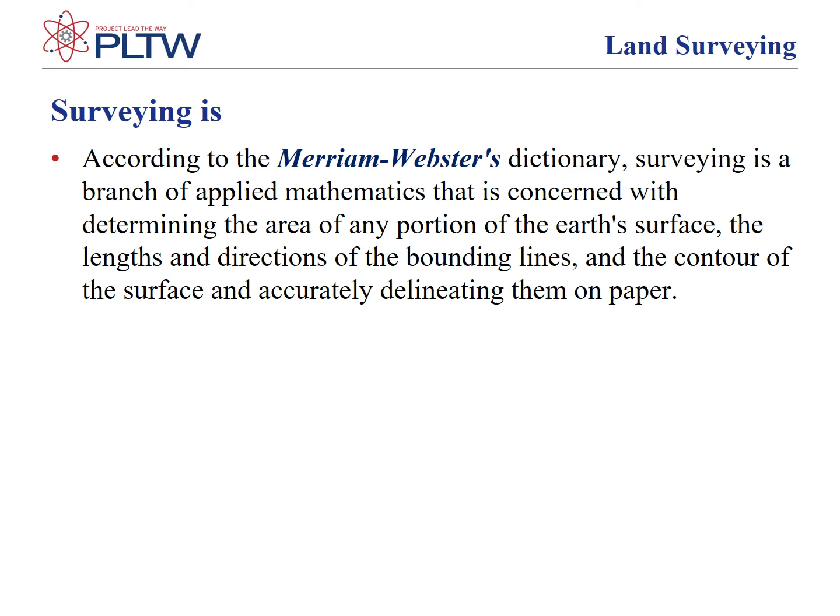According to the Merriam-Webster's dictionary, surveying is a branch of applied mathematics that is concerned with determining the area of any portion of the Earth's surface, the lengths and directions of the bounding lines, and the contour of the surface, and accurately delineating them on paper.

According to the publication Definitions of Surveying and Related Terms, a survey is defined as inspecting or investigating something in order to determine its state or condition, and surveying is the actual making of a survey and the recording and/or delineation of dimensions and details for subsequent use.

At its core, surveying is a profession tied to the accurate location of property boundaries.

The following are just a few of the most famous surveyors from history. George Washington, who was surveyor general in Virginia in 1749. Thomas Jefferson, who was a county surveyor for Albemarle County, Virginia in 1773. Lewis and Clark, who led an expedition to explore and survey the West. Daniel Boone, who resolved Kentucky's land disputes. And Abraham Lincoln, who was a surveyor in Illinois when elected as a state legislature.

Land surveying is the science of determining the relative positions of points on the Earth's surface. It is a wide area of study with many different types and methods employed by surveyors. There are two categories of land surveys that require different surveying methods: geodetic surveys and plane surveys.

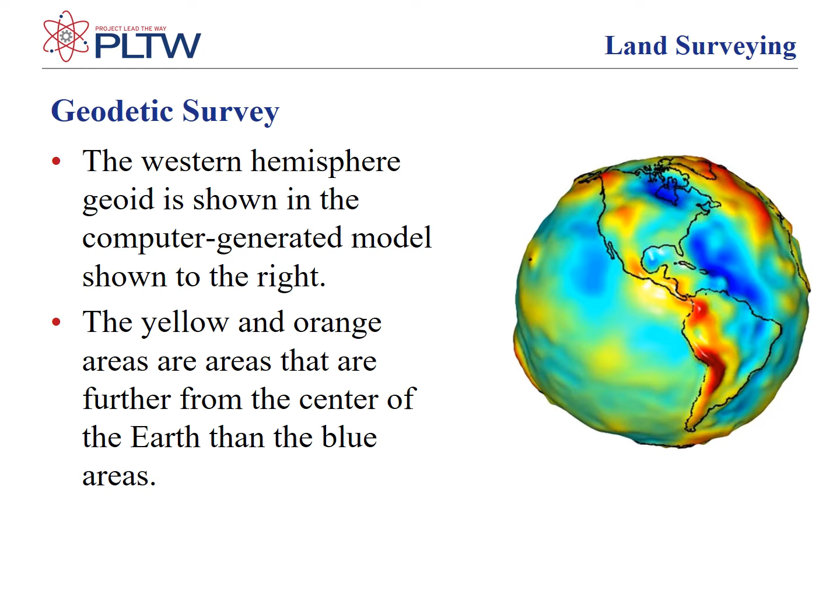Geodetic surveys use the geoid or another similar shaped model as a basis. These surveys are performed with great precision and are used to establish highly accurate control networks that provide points of known position throughout the U.S. and the world.

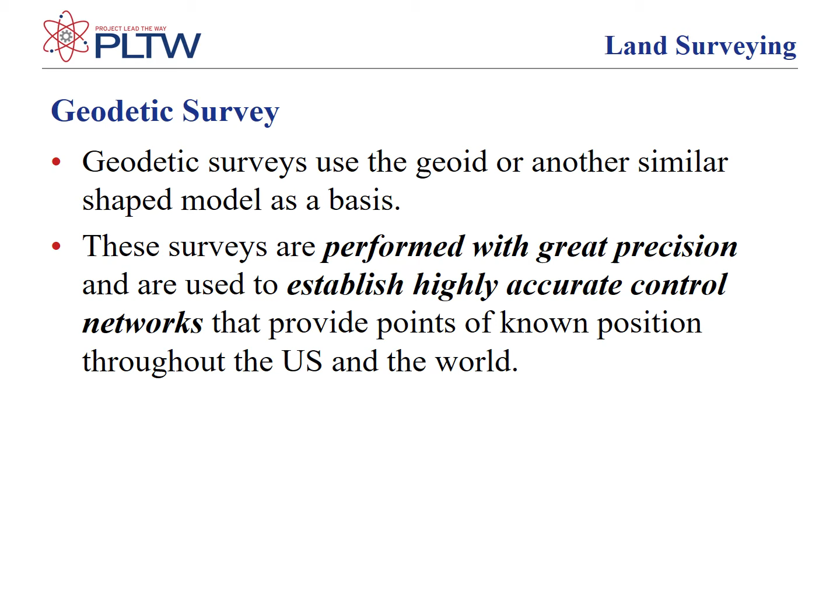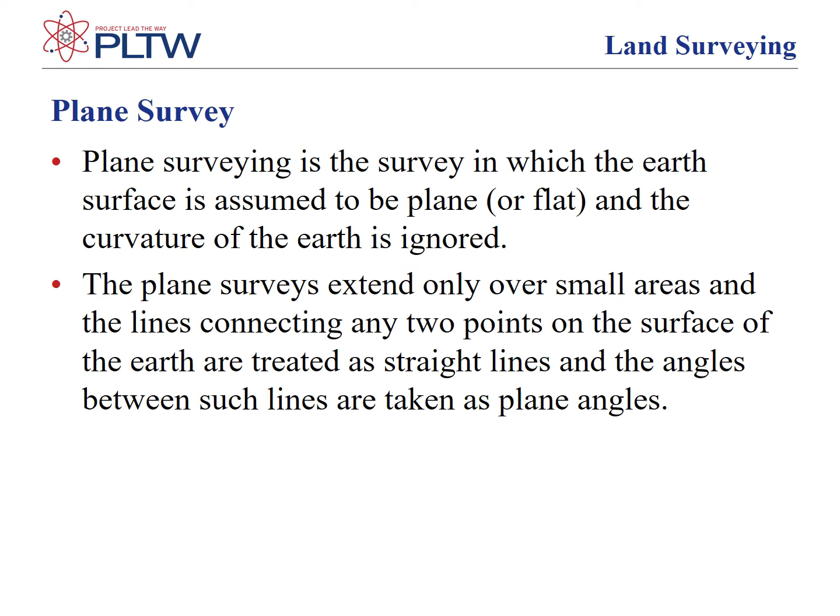Plane surveying is the survey in which the Earth's surface is assumed to be plane or flat, and the curvature of the Earth is ignored. Plane surveys extend only over small areas, and the lines connecting any two points on the surface of the Earth are treated as straight lines, with the angles between such lines taken as plane angles.

Plane surveys are more common than geodetic surveys. They are precise enough for small-scale surveys in a limited area, such as a construction site. They are used to determine legal boundaries, construction surveys, and small area topographic or control surveys.

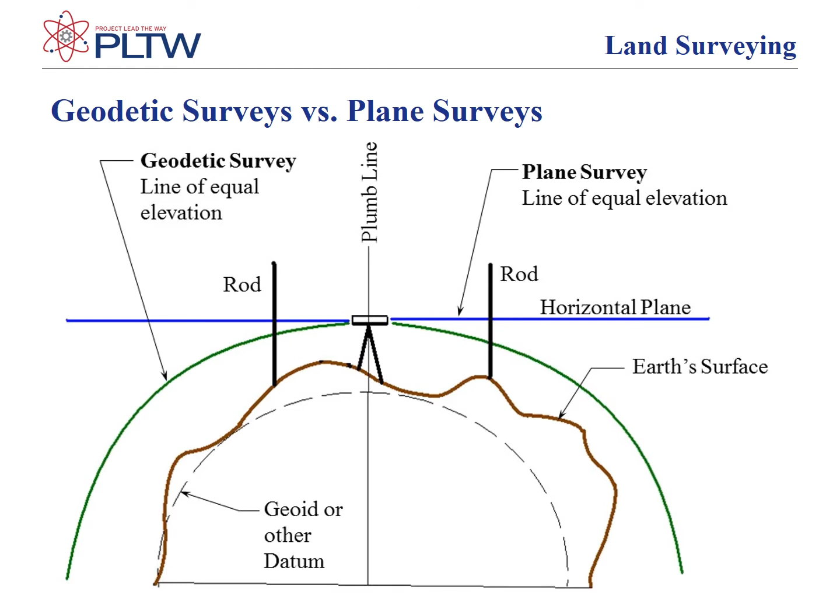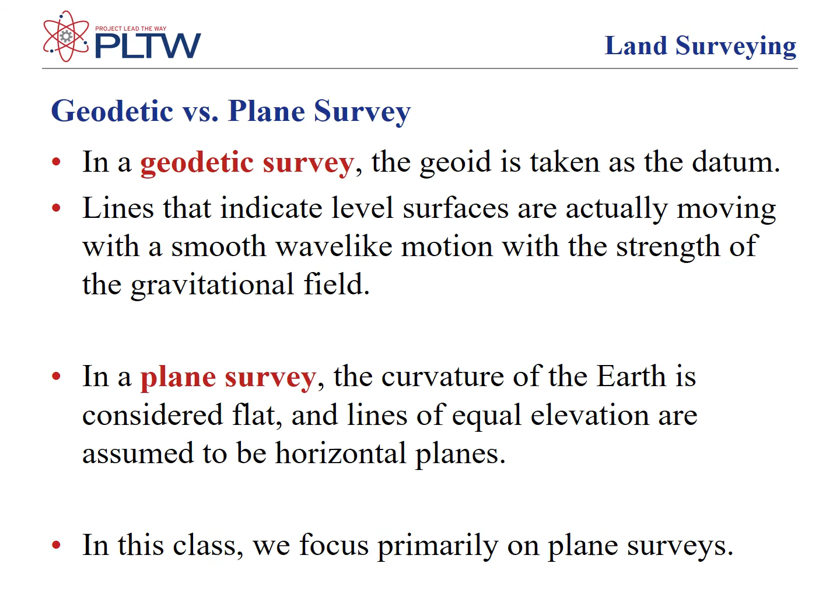This image shows the difference between a geodetic survey and a plane survey. In a geodetic survey, the geoid is taken as the datum. Lines that indicate level surfaces actually move with a smooth wave-like motion following the strength of the gravitational field. In a plane survey, the curvature of the Earth is considered flat, and the lines of equal elevation are assumed to be horizontal planes. In this class, we focus primarily on plane surveys.

Here are some of the types of surveys that we will cover in this presentation: control surveys, topographic surveys, property surveys, site surveys, and construction surveys.

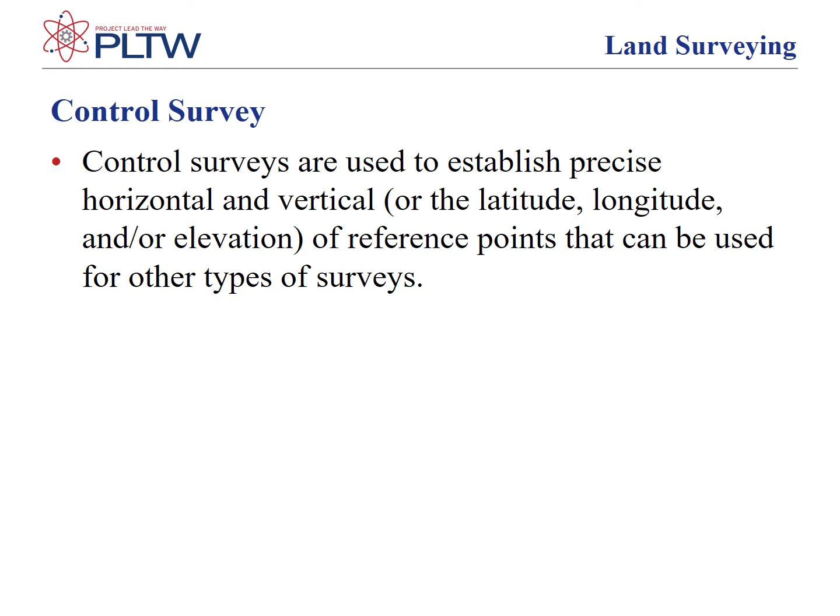Control surveys are used to establish precise horizontal and vertical positions, or the latitude and longitude and/or elevation of reference points that can be used for other types of surveys.

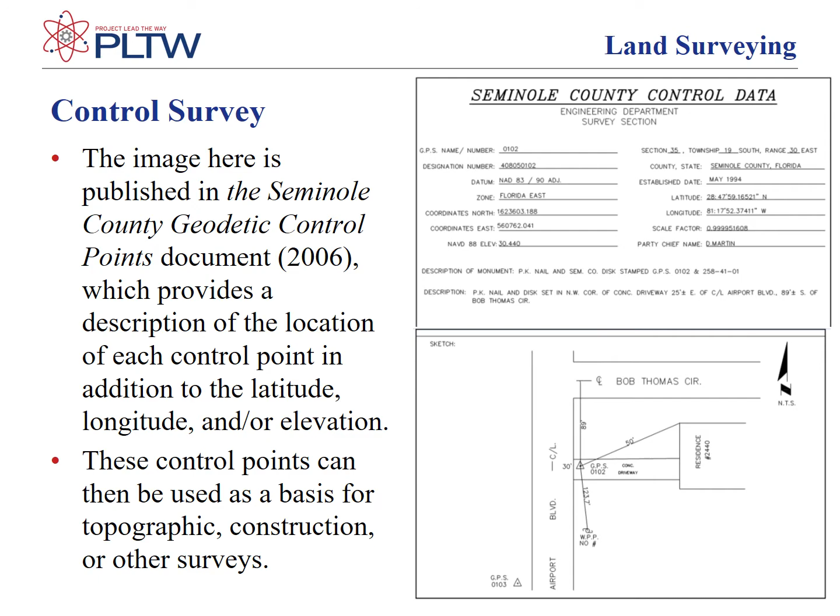A topographic survey gathers data on the location of natural and man-made features, contours, and ground elevation to create a topographic map.

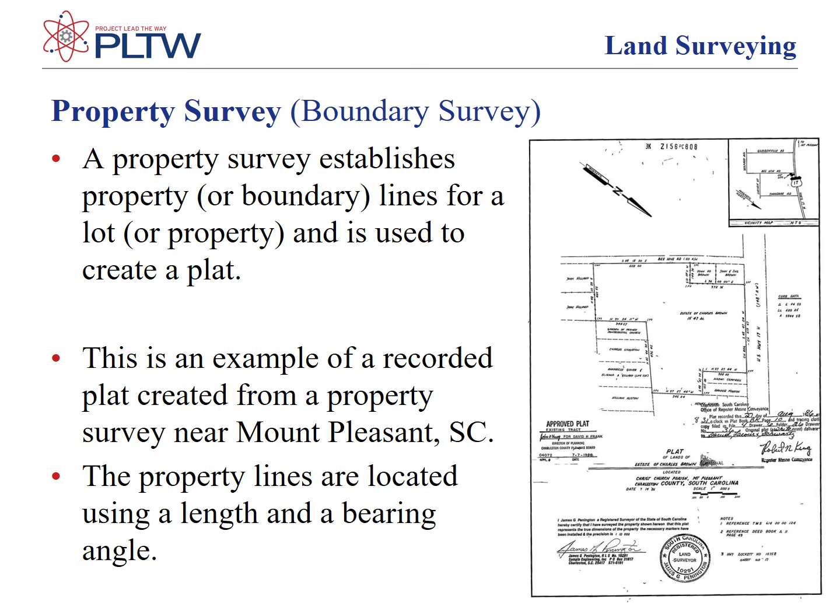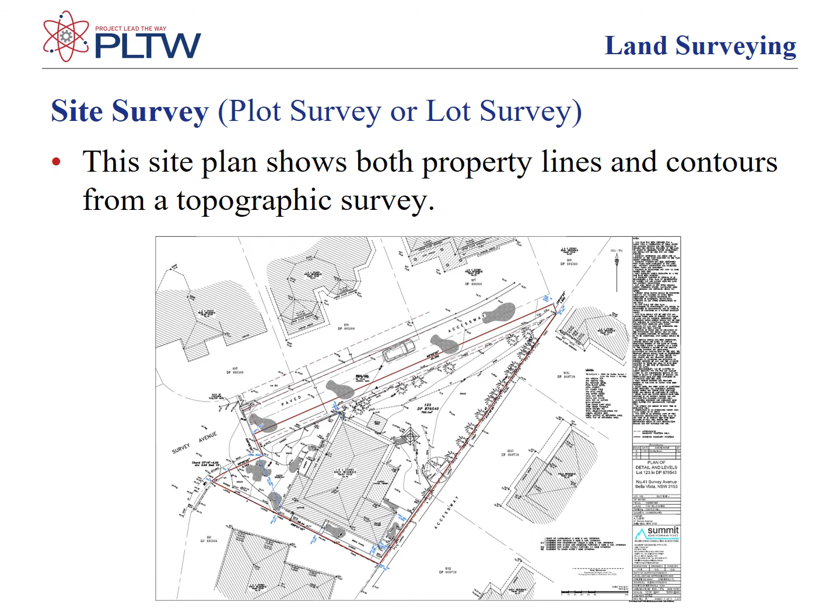A construction survey locates points and elevations that can be used to establish correct locations and elevations for engineering and architectural projects. Examples of construction surveys include staking a line and grade for a foundation, a fence, or a road.

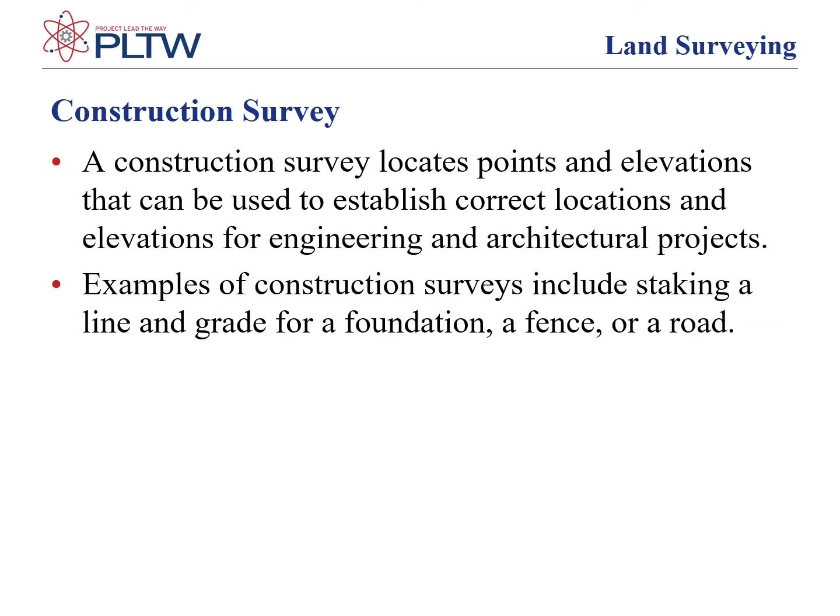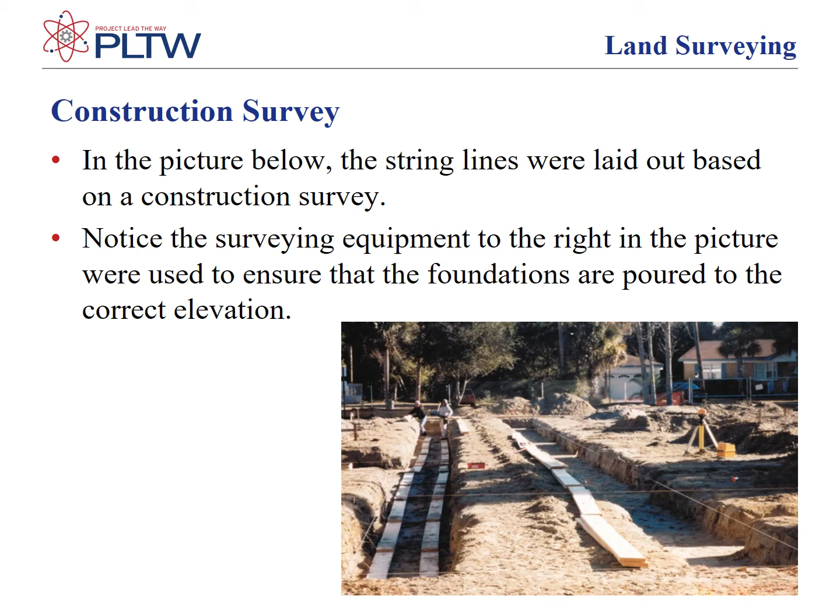In the picture below, the string lines were laid out based on a construction survey. Notice the surveying equipment to the right in the picture were used to ensure that the foundations are poured to the correct elevation.

There are many other types of surveying employed for different purposes that use different techniques. The following are just a few of the other types of surveys: bathymetric surveys, deformation surveys, foundation surveys, geological surveys, and hydrographic surveys.

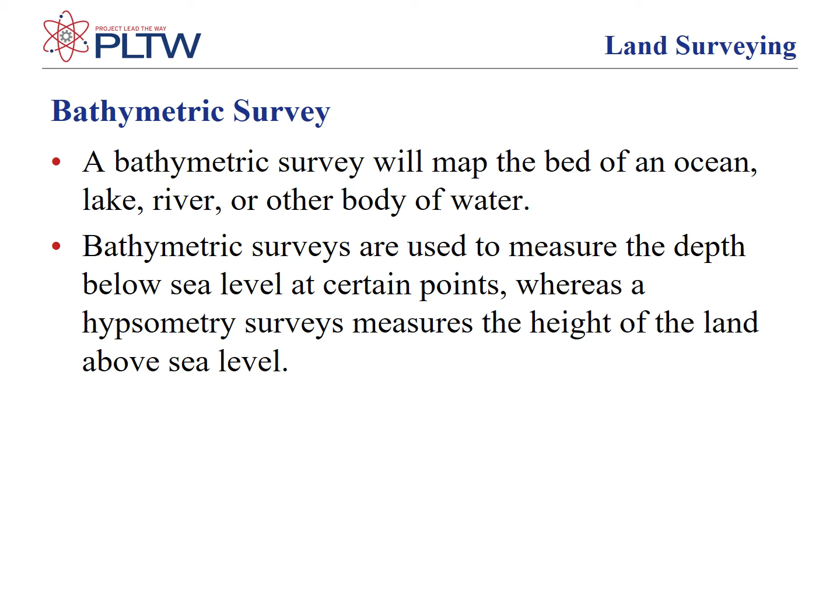A bathymetric survey will map the bed of an ocean, lake, river, or other body of water. Bathymetric surveys are used to measure the depth below sea level at certain points, whereas hypsometry surveys measure the height of the land above sea level.

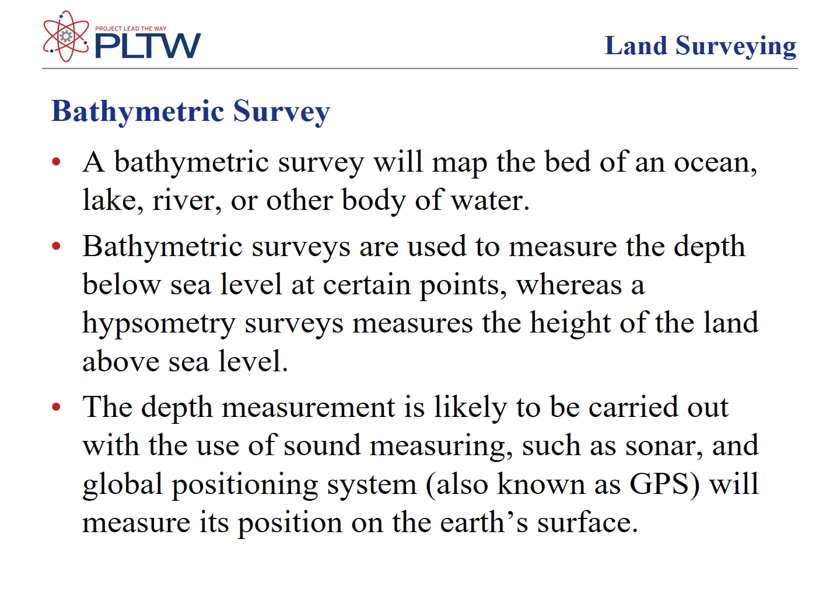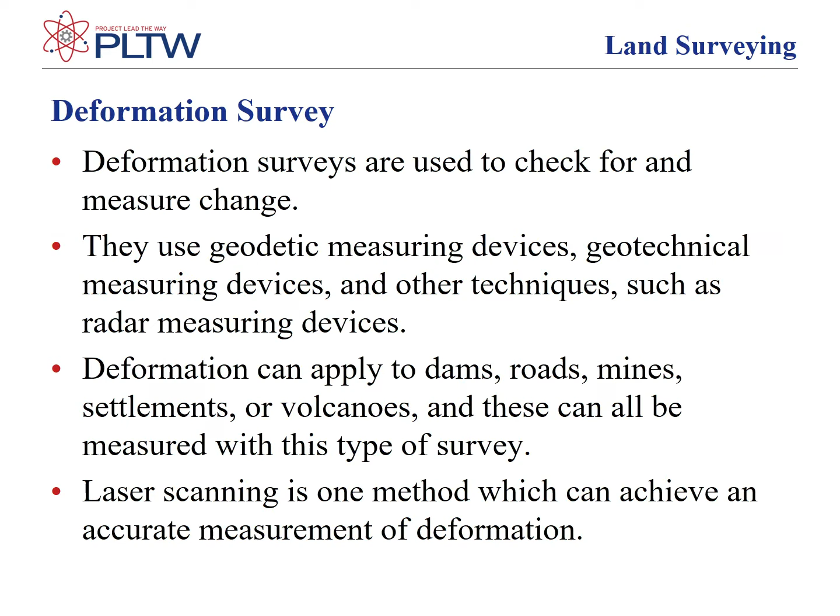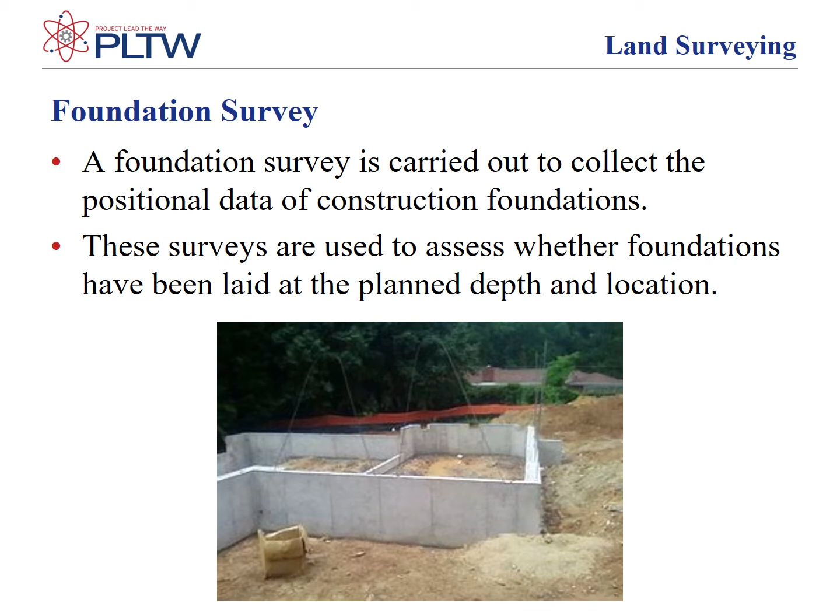A foundation survey is carried out to collect the positional data of construction foundations. These surveys are used to assess whether foundations have been laid at the planned depth and location. Hydrographic surveys map the coastline and seabed and are used in navigation and engineering.

Here are a common set of reference points for all surveys. Horizontal datum, which is a collection of points of a known latitude and longitude. Vertical datum, which is a collection of points of a known elevation. A benchmark, which is a permanent mark that establishes a point of known elevation.

You can search for information on datum reference points by referring to the National Geodetic Survey Data Explorer's National Geodetic Survey, which can be found at this link. The map you are about to see shows an area of a future project that will be located in Noblesville, Indiana. The red points are datum reference points. This map shows the datum reference points from the NGS Survey Control Map.

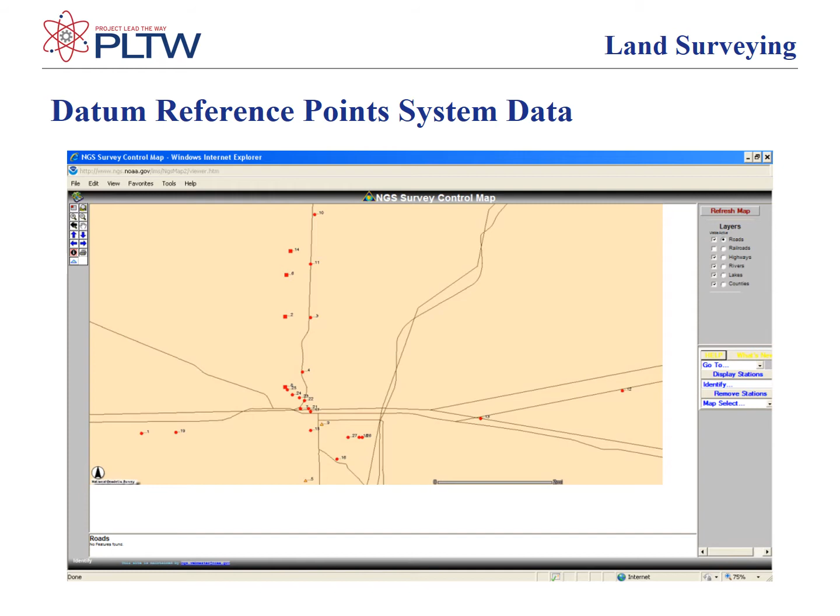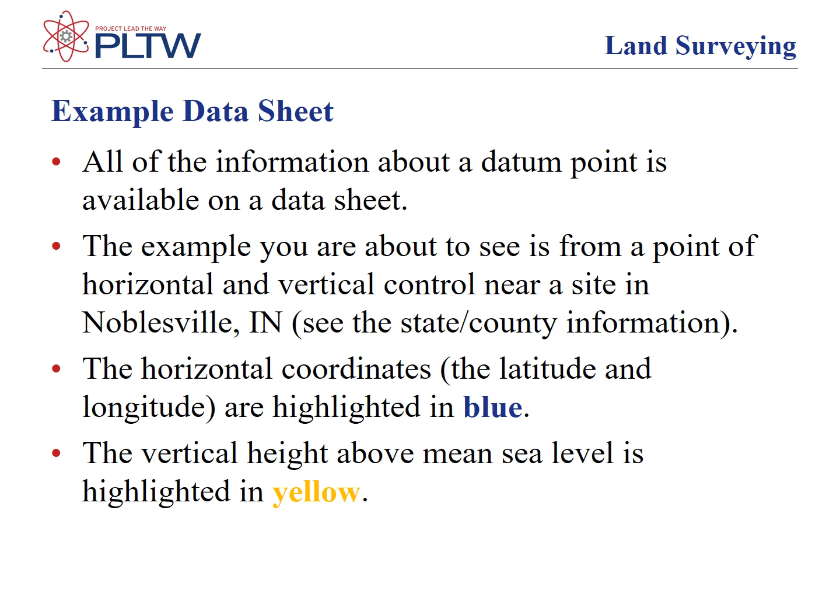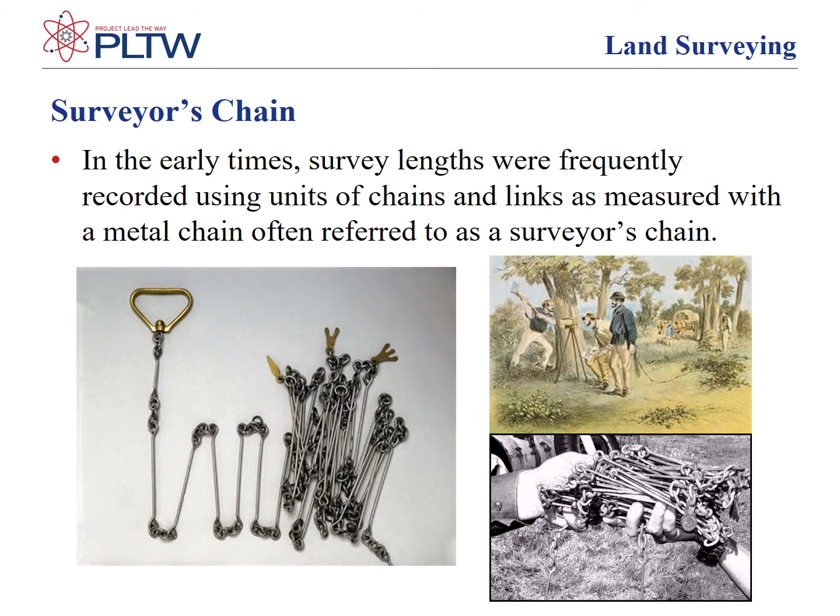In early times, survey lengths were frequently recorded using units of chains and links as measured with a metal chain, often referred to as a surveyor's chain. All optical equipment requires a visual line of sight. A level measures vertical differences in elevation. A theodolite measures vertical and horizontal angles.

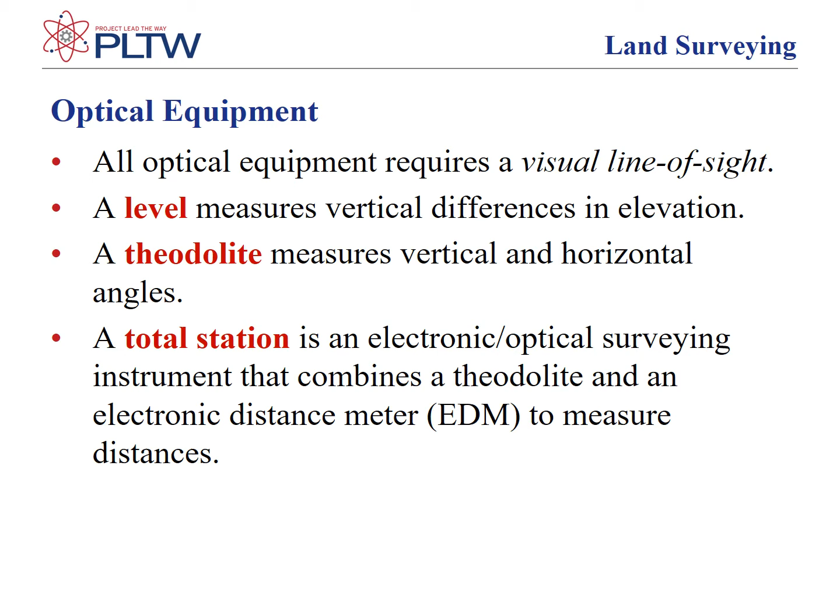An automatic level is commonly used on building sites because it is easy to set up and use. An internal compensator can automatically level the instrument. It can measure difference in elevation between the line of sight and a point.

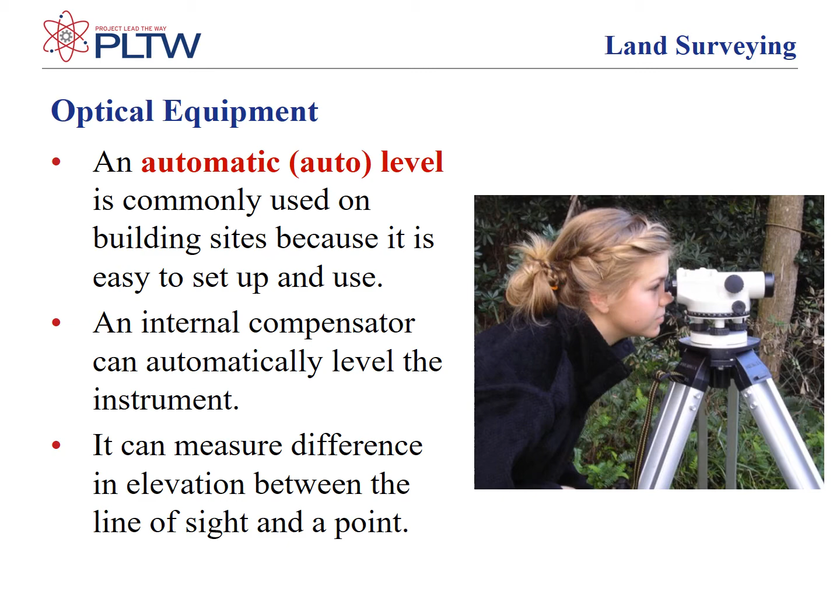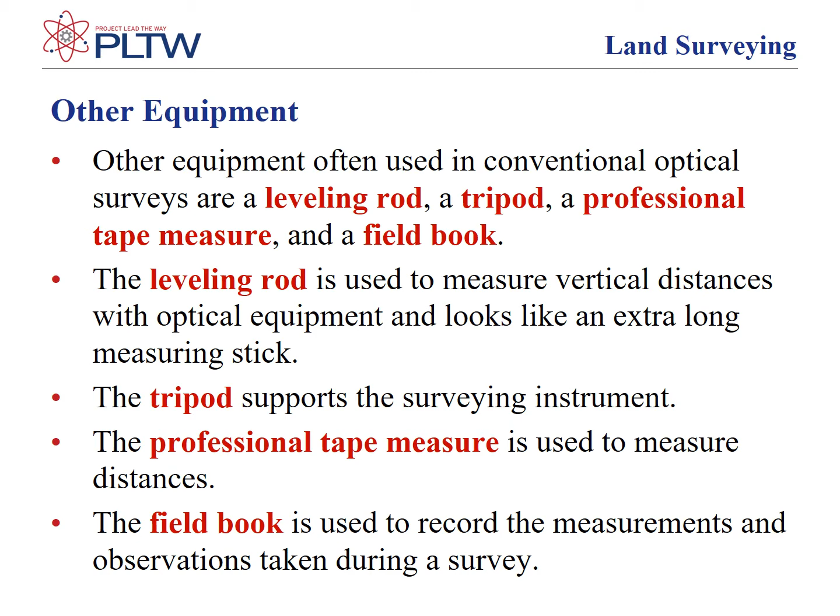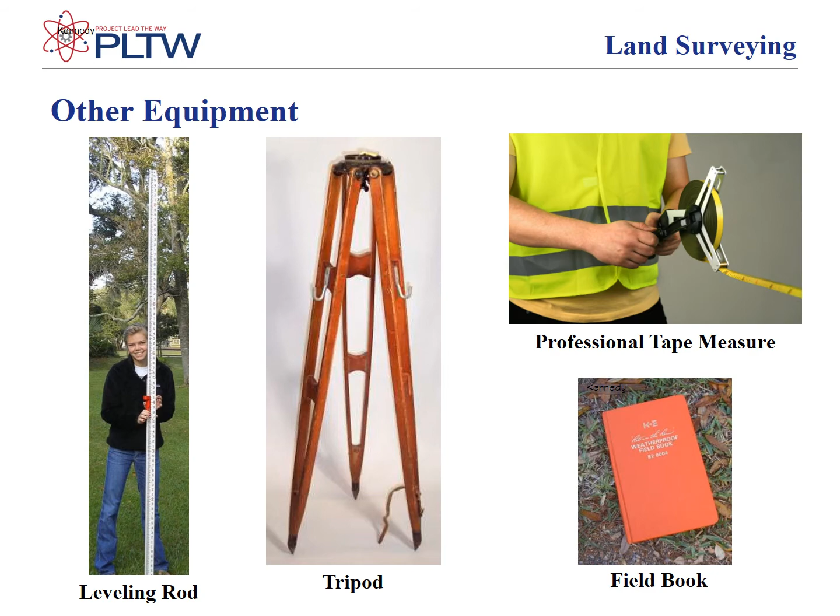The Global Positioning System, also known as GPS, is a global navigation satellite system that can be used for surveying as well as navigation. The GPS system is a free-to-access system developed by the United States Department of Defense. It consists of a constellation of many satellites that orbit the Earth, each broadcasting a unique radio signal. GPS receivers intercept several satellite signals in order to determine the distance to each satellite based on the time it takes the signal to reach the receiver.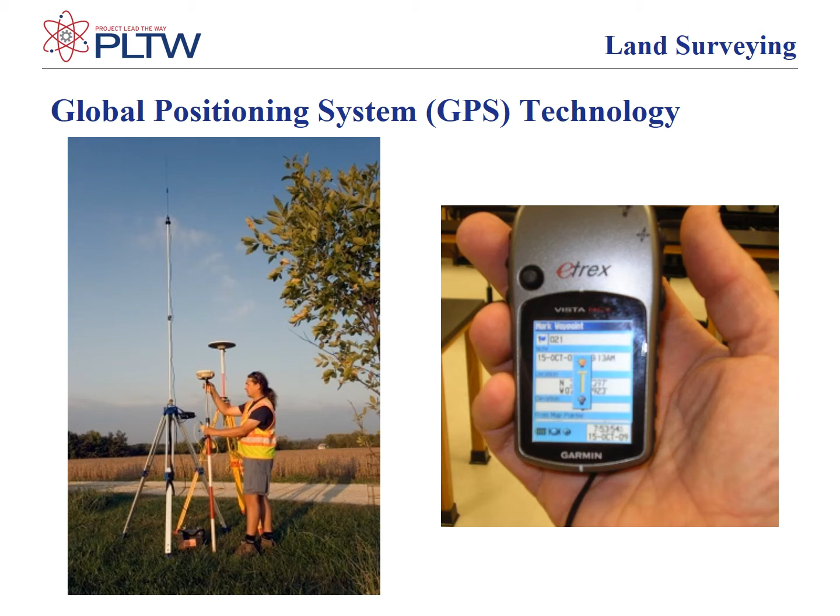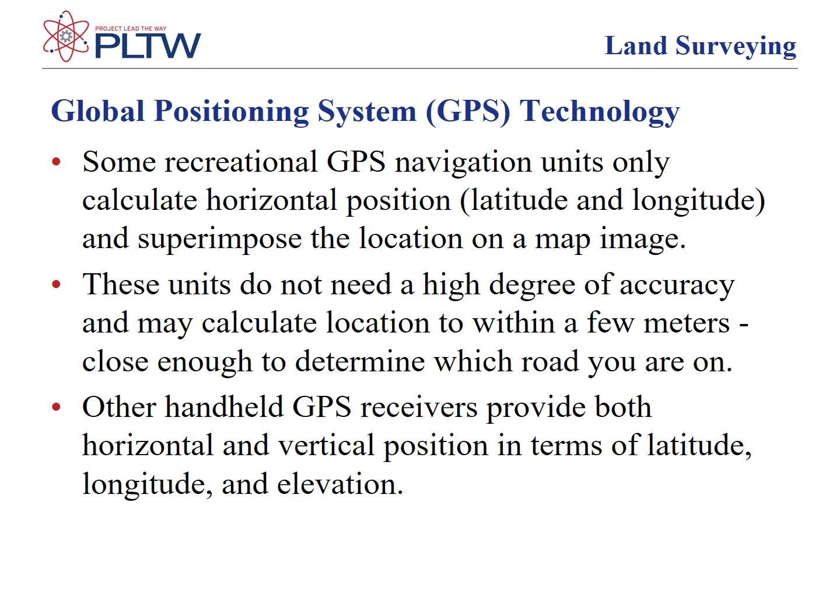Some recreational GPS navigation units only calculate horizontal position, latitude and longitude, and superimpose the location on a map image. These units do not need a high degree of accuracy and may calculate location to within a few meters, close enough to determine which road you are on. Other handheld GPS receivers provide both horizontal and vertical position in terms of latitude, longitude, and elevation. The accuracy varies with the unit.

Professional-grade GPS surveying equipment provides a much higher level of accuracy than the lower-cost recreational units. It calculates both horizontal and vertical position to a high degree of accuracy.

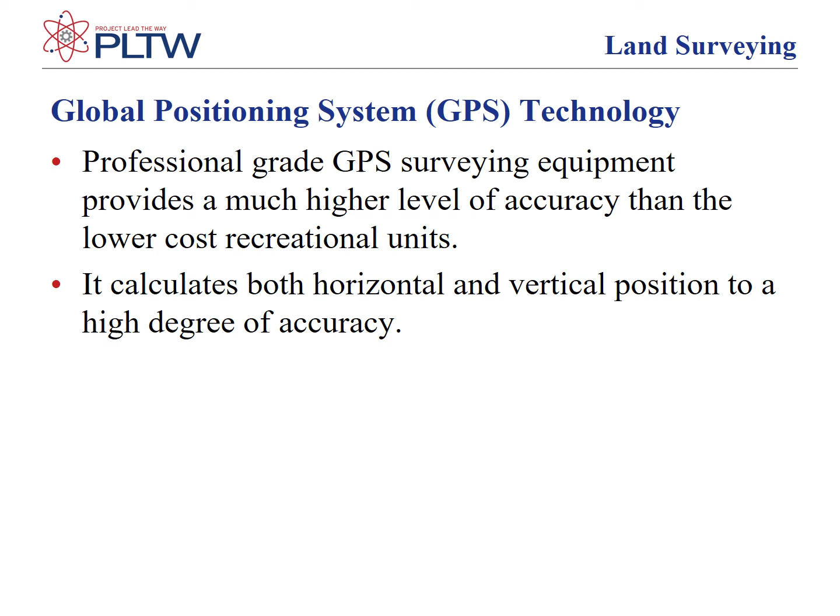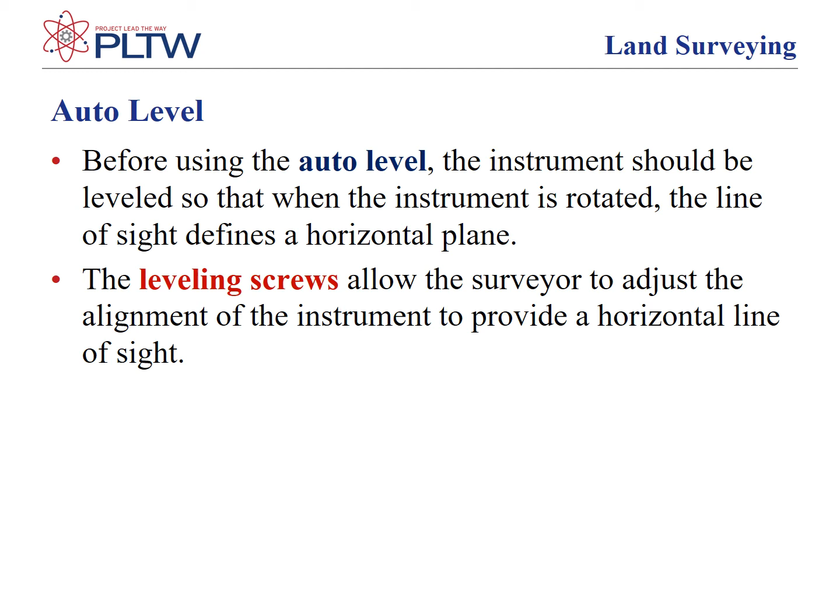Let's begin by looking at the various parts of an auto level. Before using the auto level, the instrument should be leveled so that when the instrument is rotated, the line of sight defines a horizontal plane. The leveling screws allow the surveyor to adjust the alignment of the instrument to provide a horizontal line of sight. If properly calibrated, the instrument will be level when the bubble in the bullseye level is within the circle.

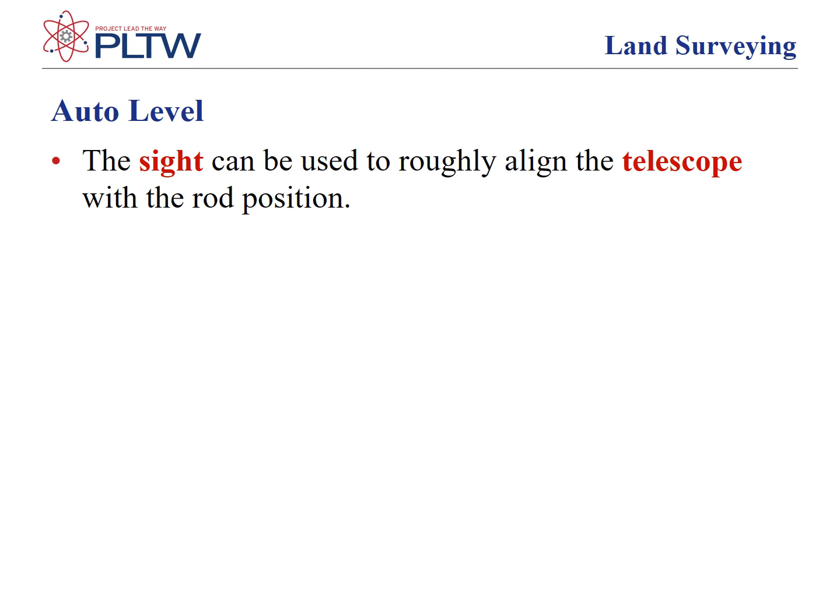The mirror will reflect the bullseye level when viewing from the eyepiece height. The sight can be used to roughly align the telescope with the rod position. Rotation of the horizontal tangent knob results in a fine horizontal adjustment. When looking through the telescope, it will slowly adjust the view left to right. The horizontal angle rotation ring is used to approximate horizontal angles. Rotating the diopter adjustment ring, which surrounds the eyepiece, can sharpen the crosshairs when viewed through the eyepiece.

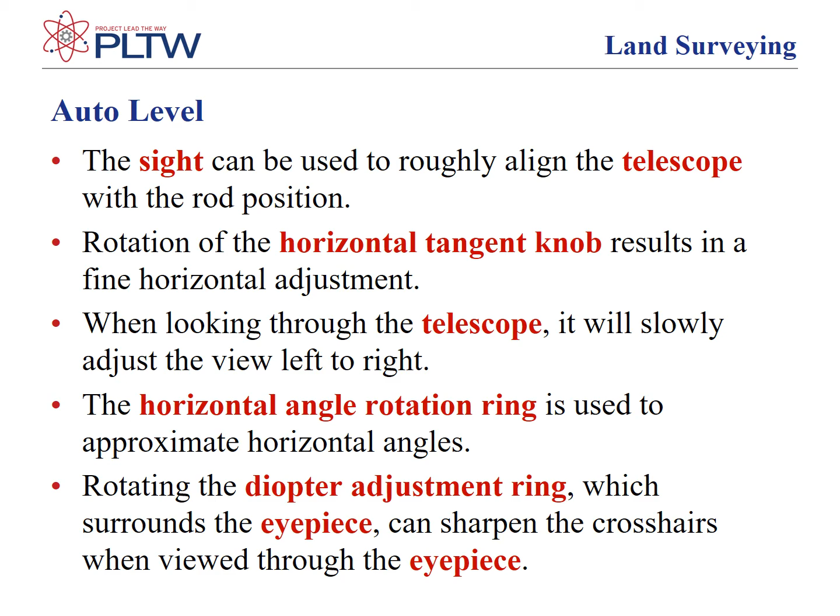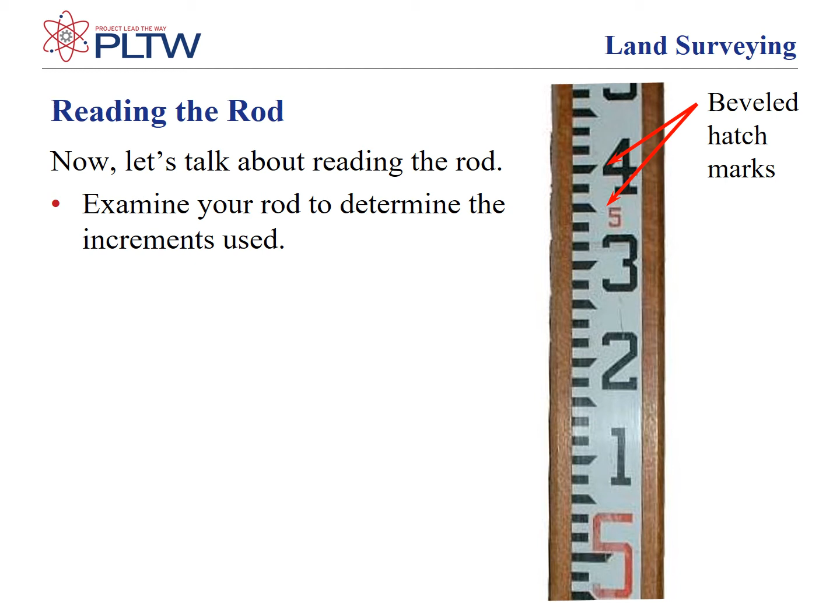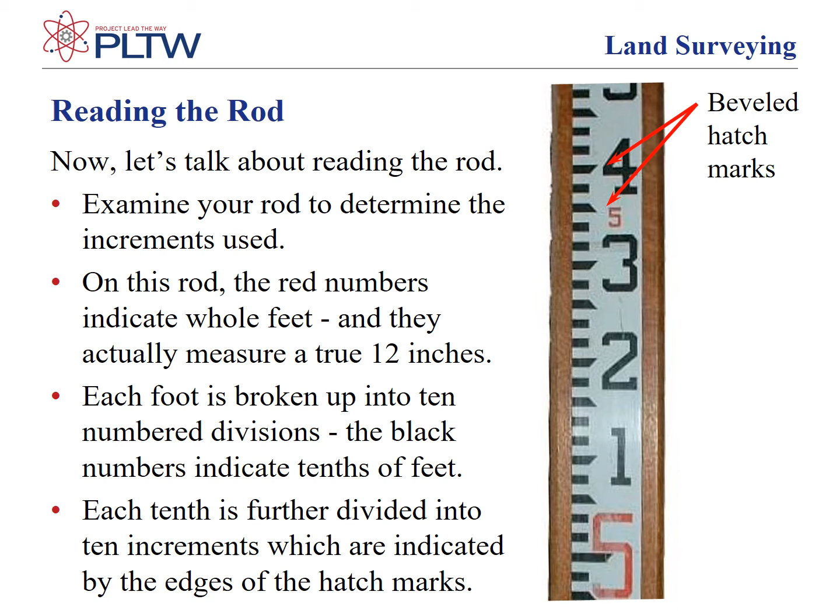Now, let's talk about reading the rod. Examine your rod to determine the increments used. On this rod, the red numbers indicate whole feet, and they actually measure a true 12 inches. Each foot is broken up into 10 numbered divisions. The black numbers indicate tenths of feet. Each tenth is further divided into 10 increments, which are indicated by the edges of the hatch marks. You will have to get used to counting edges of lines instead of the lines themselves.

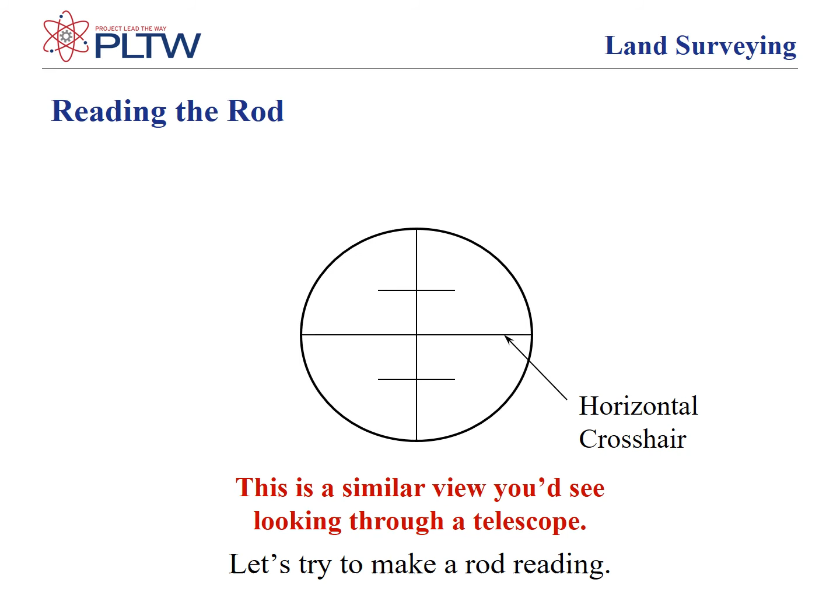The tenths of feet and measurements that end in 5/100ths of feet are indicated by the long edge of a beveled hatch mark. This is a similar view you'd see looking through a telescope. You'd see the horizontal crosshair, the vertical crosshair, and the stadia hairs. What measurement does the horizontal crosshair indicate? The answer is 5.25 feet.

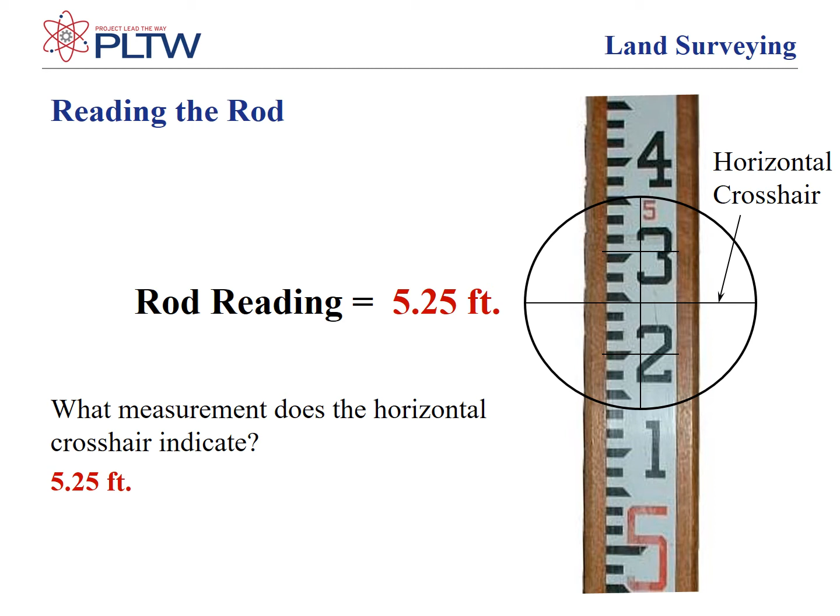This means that the line of sight of the instrument is at 5.25 feet above the point on which the rod rests. Notice that the horizontal crosshair is located at 5, then 0.2, and then 5. That's how we get 5.25 feet. It's at the bottom of the hash mark. If it were above this hash mark, it would have read 5.26 feet. The bottom of these hash marks are odd numbers and the top are even.

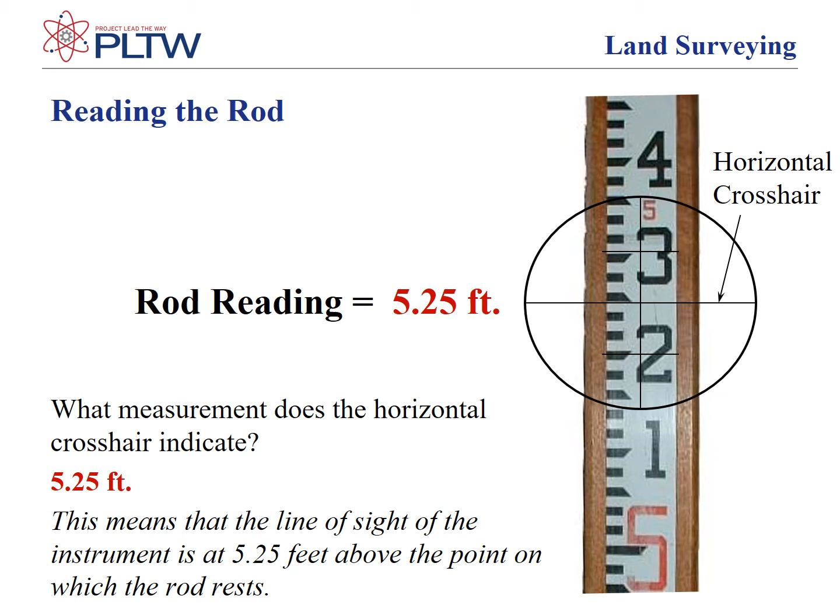You will notice that the stadia hairs can also be read. What is the upper stadia reading? The answer is 5.3 feet. When the crosshair or stadia readings fall within the white or black areas of the rod between the hash marks, choose the closest edge. What is the lower stadia reading? The answer is 5.2 feet.

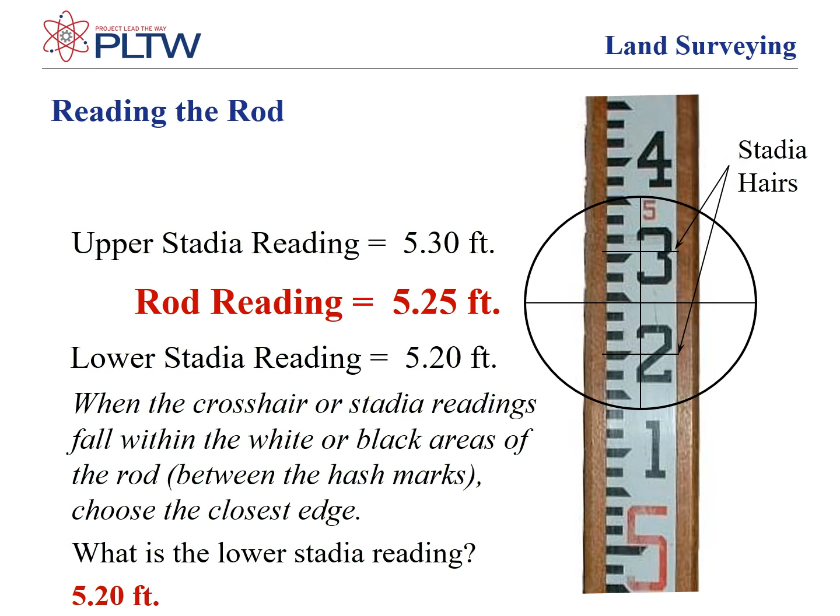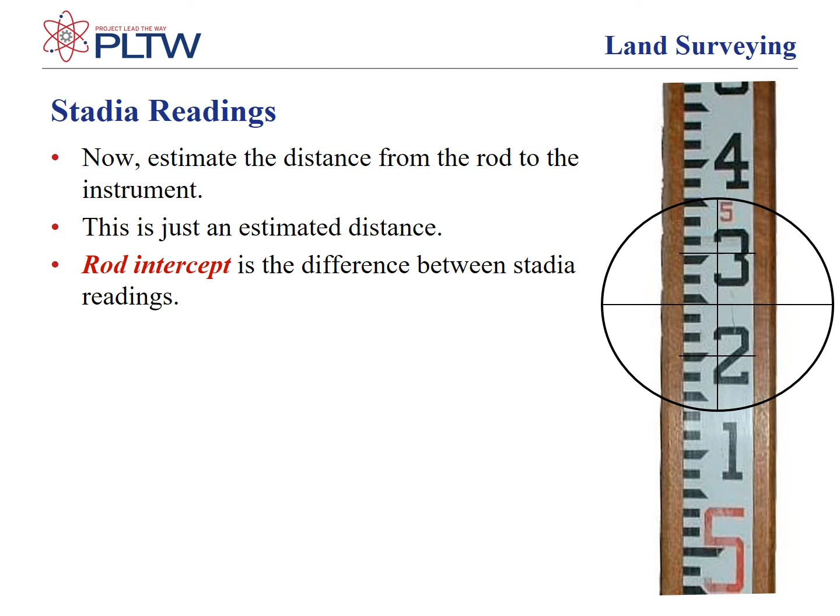Now, estimate the distance from the rod to the instrument. This is just an estimated distance. Rod intercept is the difference between stadia readings. We subtract the upper stadia from the lower stadia. Now, take the rod intercept and multiply it by the stadia multiplier. The stadia multiplier typically equals 100. The stadia multiplier will be indicated inside the instrument case or in the instructional manual.

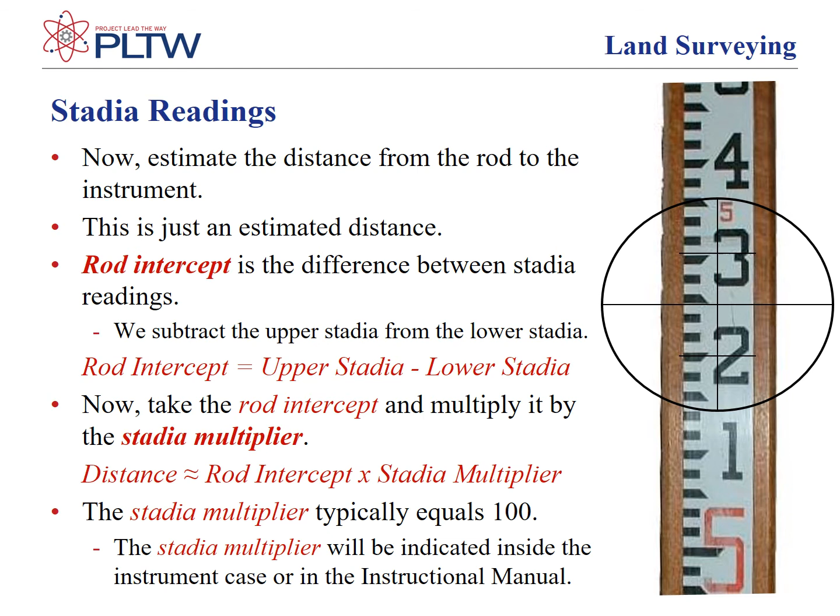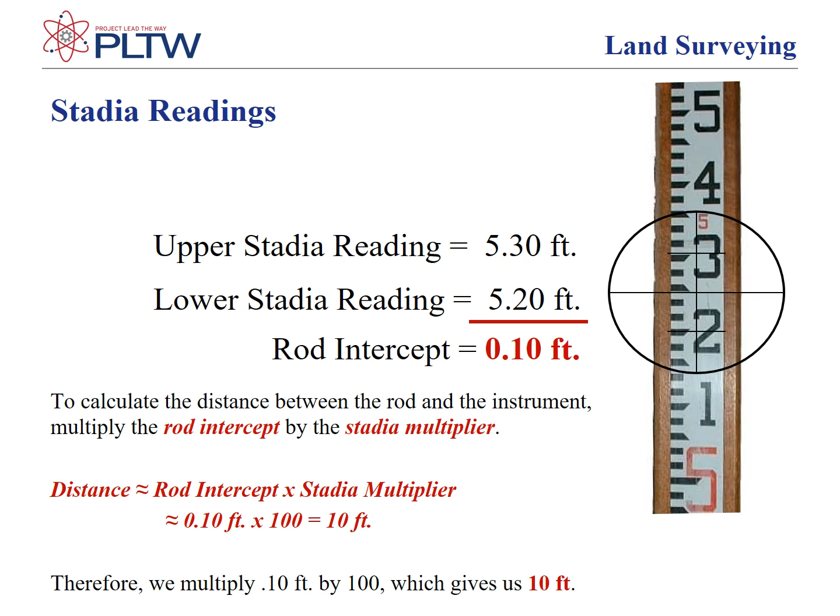Notice the rod intercept of 0.1 feet. Again, using the stadia readings, we can estimate the distance between the instrument and the rod. We calculated the rod intercept by subtracting the lower stadia reading from the upper stadia reading. Then we multiplied the rod intercept by the stadia multiplier, which is usually 100. To calculate the distance between the rod and the instrument, multiply the rod intercept by the stadia multiplier. Therefore, we would multiply 0.1 feet times 100, which would give us a distance of 10 feet.

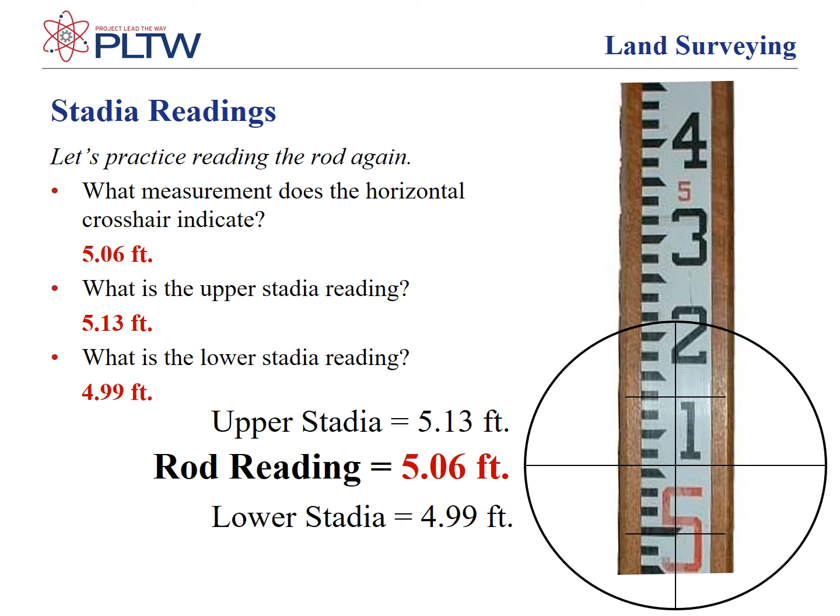Estimate the distance between the instrument and the rod using the stadia readings. What is the rod intercept? To calculate the rod intercept, we would subtract the lower stadia from the upper stadia. Therefore, we would subtract 4.99 feet from 5.13 feet, and we would get a rod intercept of 0.14 feet. What is the approximate distance? To calculate the distance, we would multiply the rod intercept times the stadia multiplier. Therefore, we would multiply 0.14 feet times 100, and that would give us a distance of 14 feet.

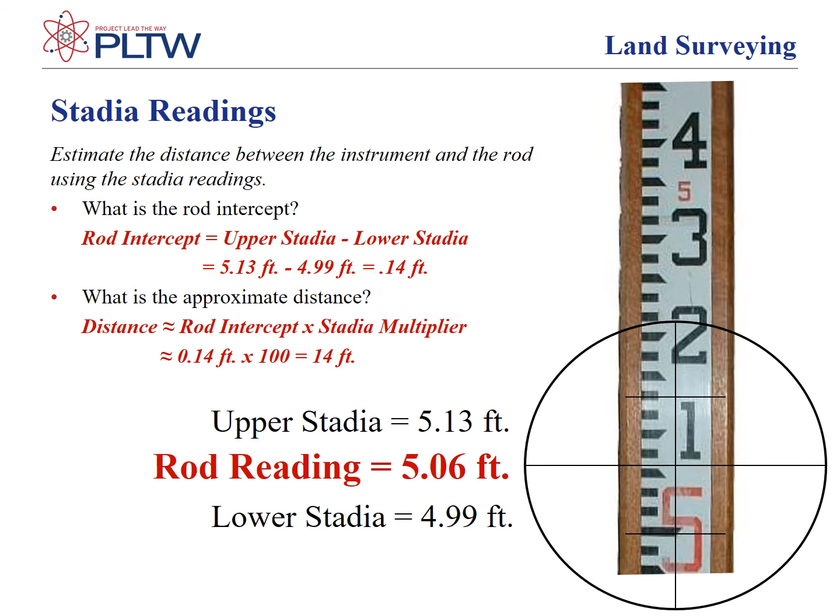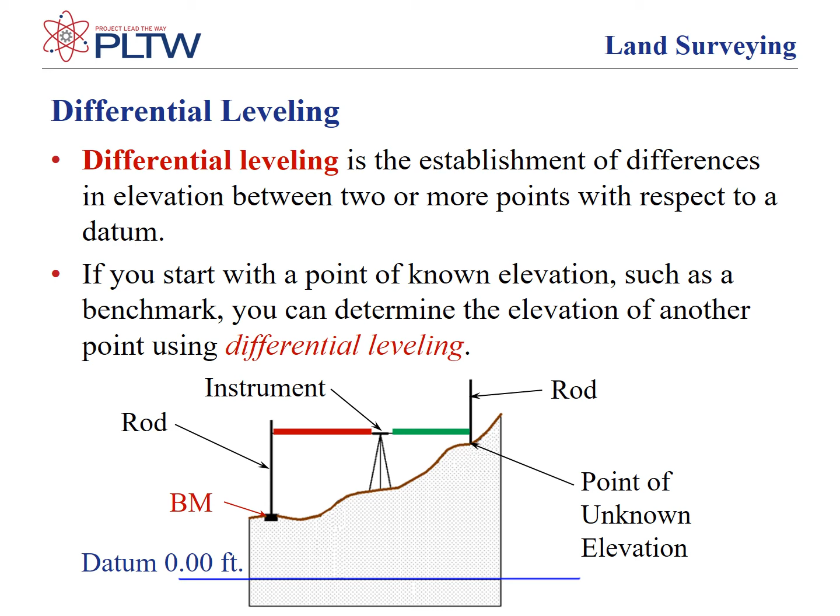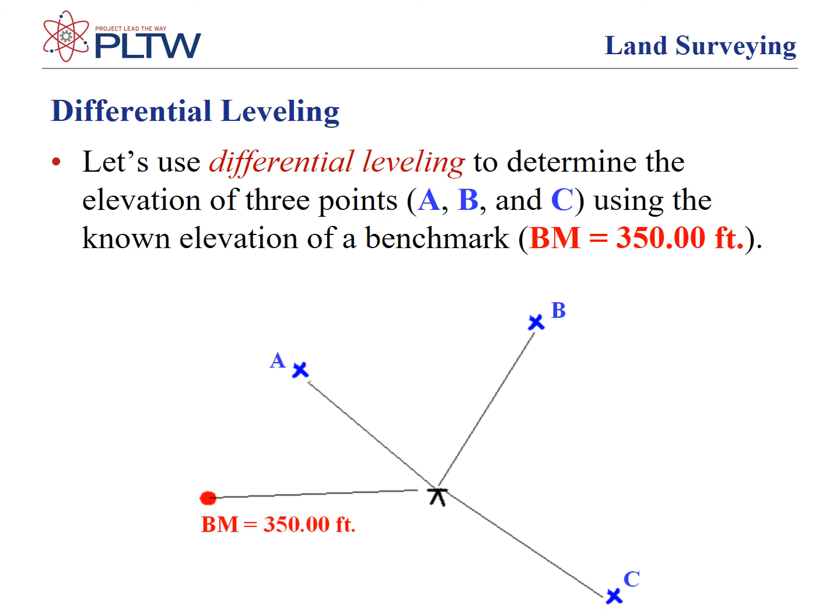Differential leveling is the establishment of differences in elevation between two or more points with respect to a datum. If you start with a point of known elevation, such as a benchmark, you can determine the elevation of another point using differential leveling. Let's use differential leveling to determine the elevation of 3 points, A, B, and C, using the known elevation of a benchmark, which is at an elevation of 350 feet.

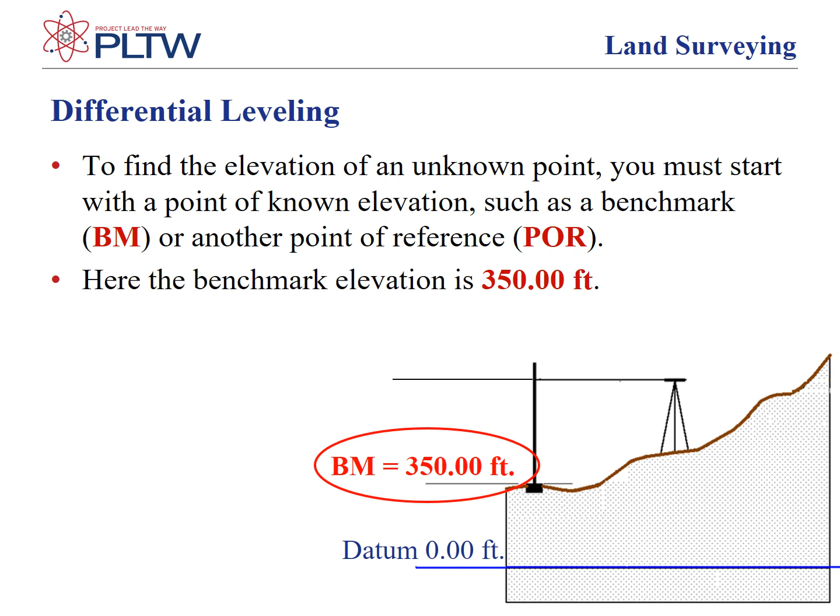Sketch this plan view of a survey in your field book, which would be your engineering notebook. To find the elevation of an unknown point, you must start with a point of known elevation, such as a benchmark or another point of reference. Here the benchmark elevation is 350 feet.

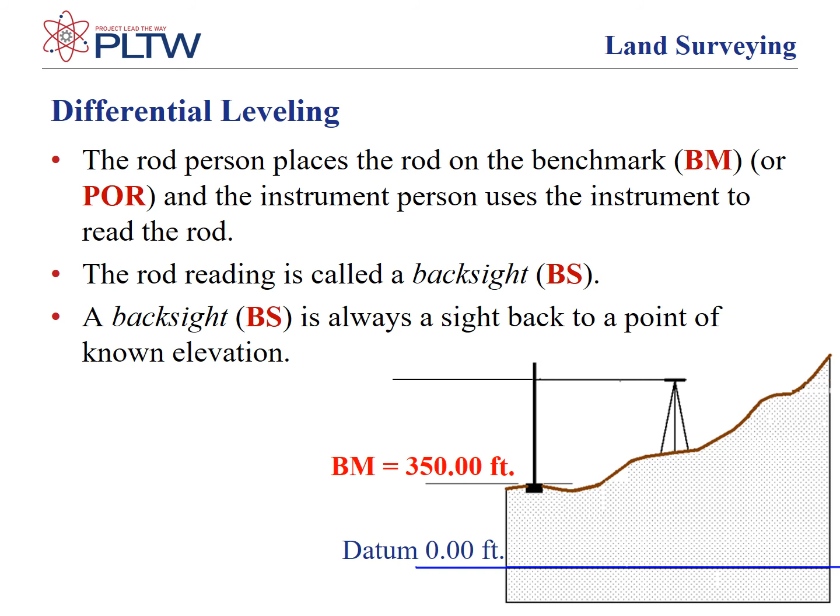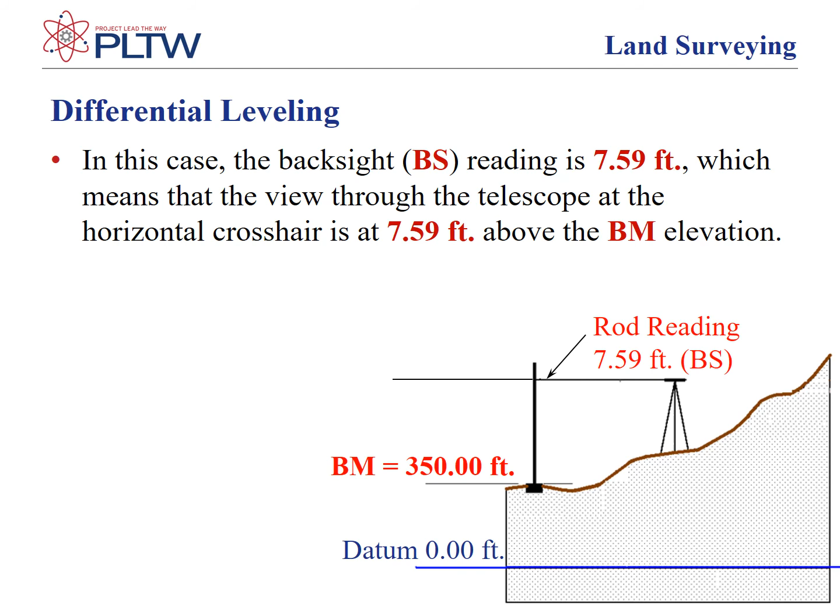The rod person places the rod on the benchmark or point of reference, and the instrument person uses the instrument to read the rod. The rod reading is called a back sight. A back sight is always a sight back to a point of known elevation. In this case, the back sight reading is 7.59 feet, which means that the view through the telescope at the horizontal crosshair is at 7.59 feet above the benchmark elevation.

We call the elevation of this line of sight the height of instrument. To find the height of instrument elevation, add the back sight to the benchmark elevation. In this case, the height of instrument is 350 feet plus 7.59 feet, or 357.59 feet. This is the distance from the datum to the line of sight of the instrument.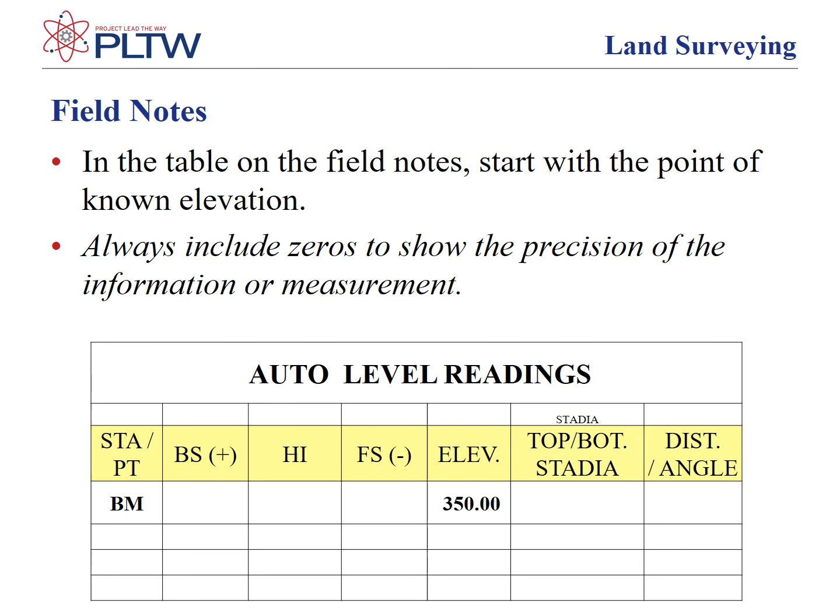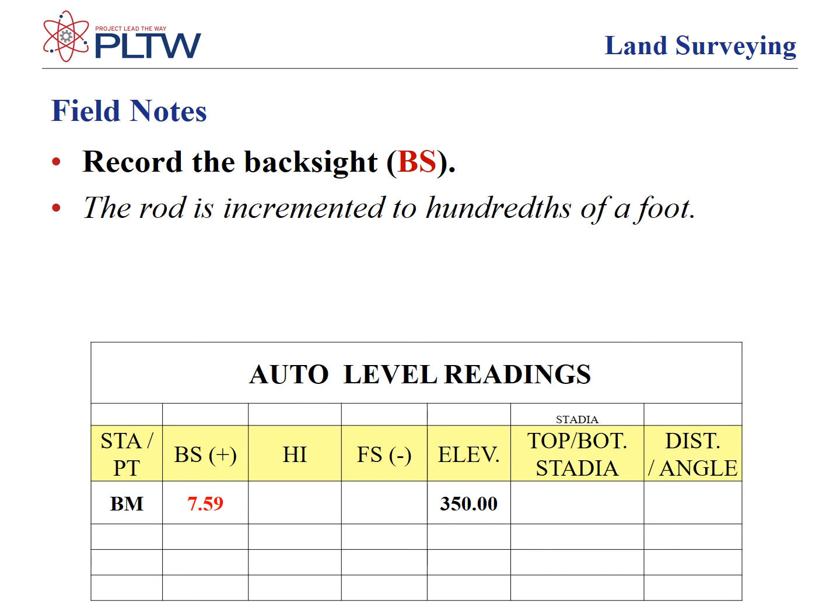In the table on the field notes, start with the point of known elevation. Always include zeros to show the precision of the information or measurement. In this case, we know the elevation to the hundredths place. Use zeros to indicate this. Record the back sight. The rod is incremented to hundredths of a foot. Find the height of instrument by adding the back sight to the known elevation. Note that the plus in the back sight column indicates that a back sight is always added to the elevation.

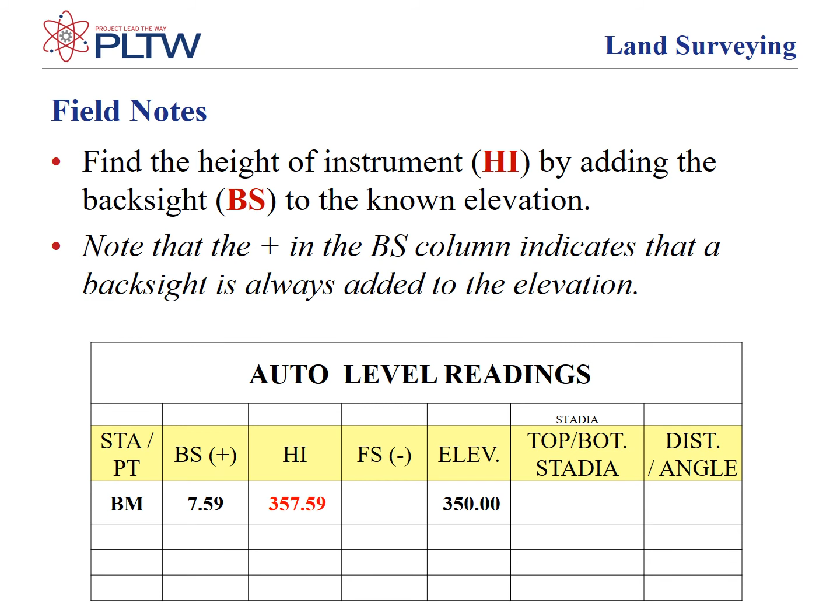Note that other information can also be recorded, including stadia readings, distance, and the horizontal angle between points. Record the stadia readings so that we can estimate distances. What is the estimated distance between the instrument and the rod using the stadia readings? First, we need to calculate the rod intercept. We calculate the rod intercept by subtracting the lower stadia from the upper stadia. Therefore, we would subtract 7.33 feet from 7.85 feet, and we would get a rod intercept of 0.52 feet.

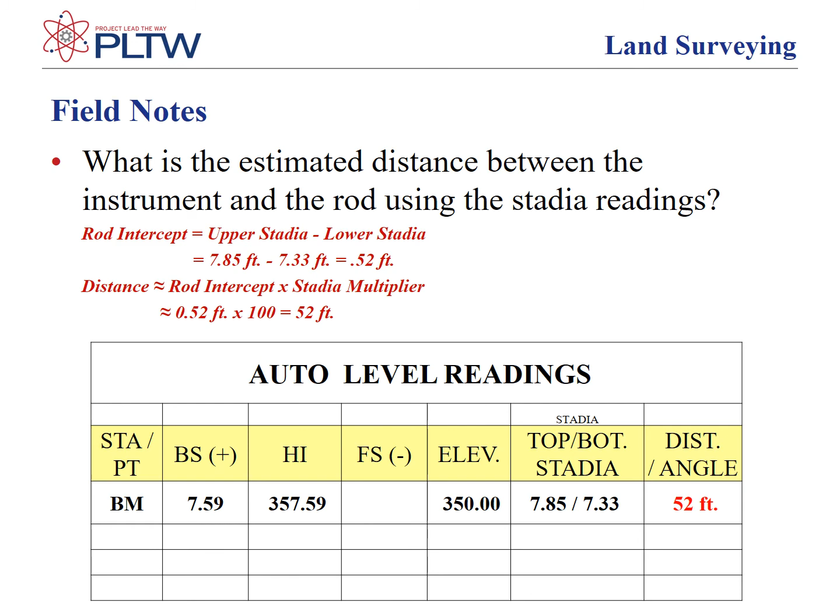Now we're able to solve for the distance. To calculate the distance, we multiply the rod intercept by the stadia multiplier. Therefore, we would multiply 0.52 feet times 100, and that would give us a distance of 52 feet. It is important to note that at this point you do not move the tripod after you take a back sight until you have first taken a foresight.

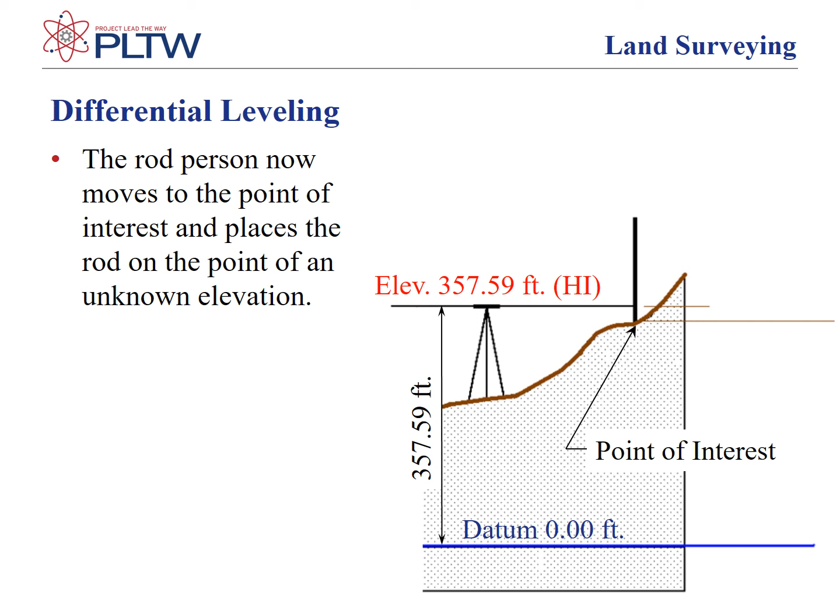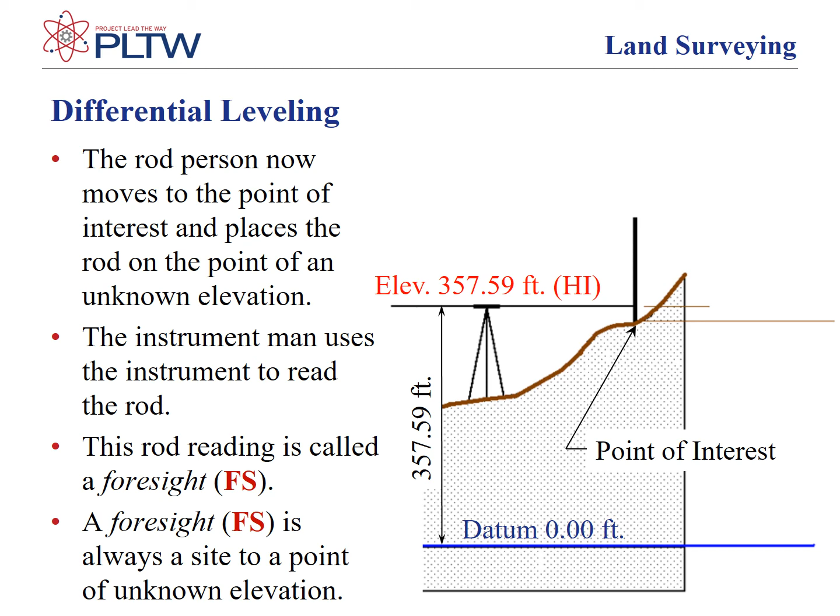The rod person now moves to the point of interest and places the rod on the point of an unknown elevation. The instrument man uses the instrument to read the rod. This rod reading is called a foresight. A foresight is always a sight to a point of unknown elevation. In this case, the foresight reading is 2.36 feet, which means that the view through the telescope looking at the horizontal crosshair is at 2.36 feet above the point of interest.

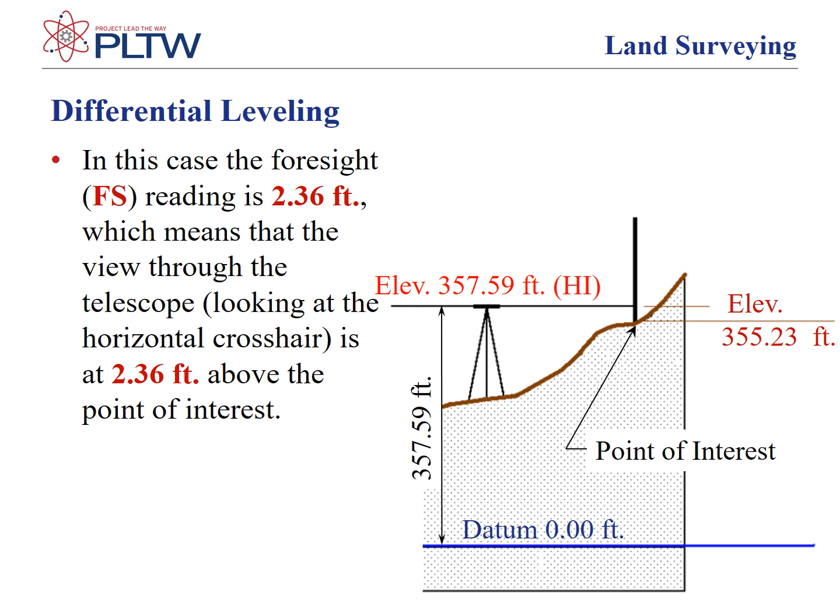The elevation of the point of interest can be calculated by subtracting the foresight reading, which is 2.36 feet, from the height of instrument, which is 357.59 feet. Now, let's identify the elevation at this point by subtracting the foresight from the height of instrument. Therefore, we would subtract 2.36 feet from 357.59 feet. In this case, the elevation of the point of interest is 355.23 feet.

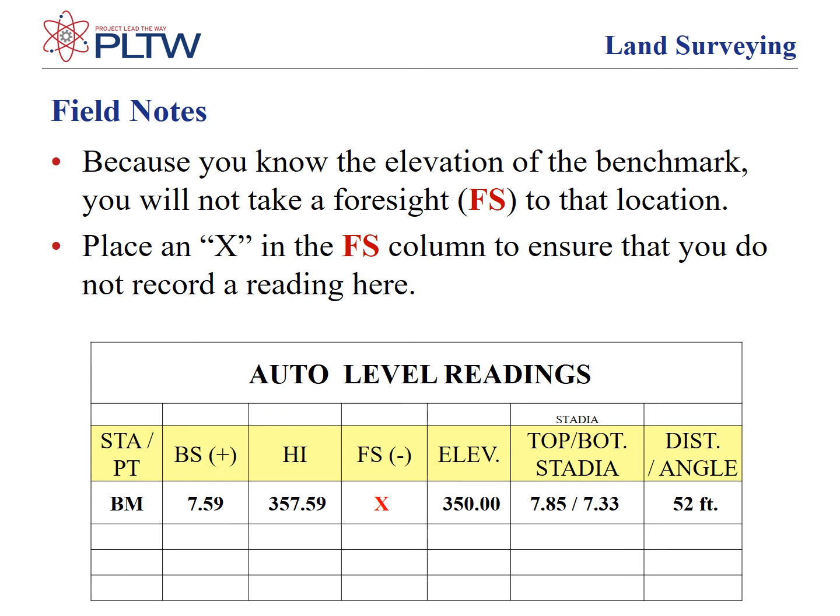Because you know the elevation of the benchmark, you will not take a foresight to that location. Place an X in the foresight column to ensure that you do not record a reading here. Record the point designation or name for the point of interest. Here we will call the location Point A or PTA. However, this could be a description such as a rock, building corner, top of curb, or some other permanent feature.

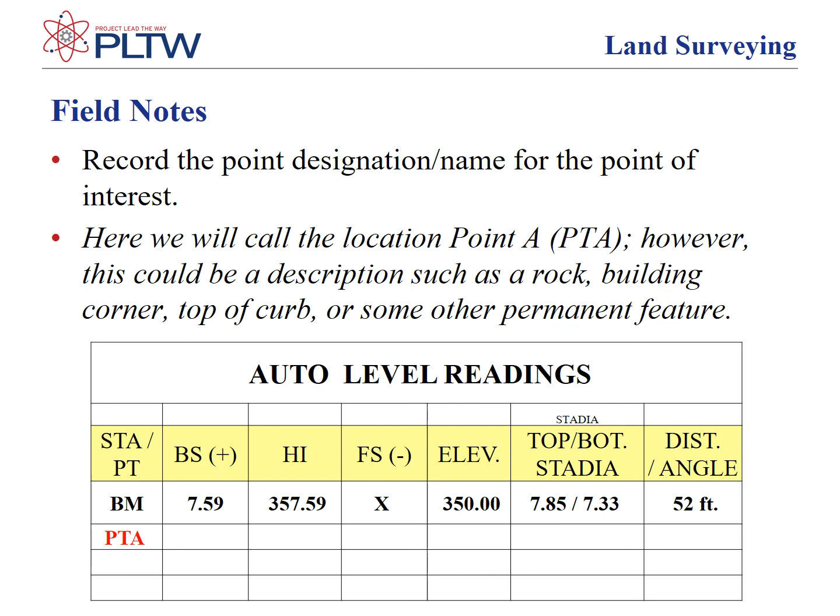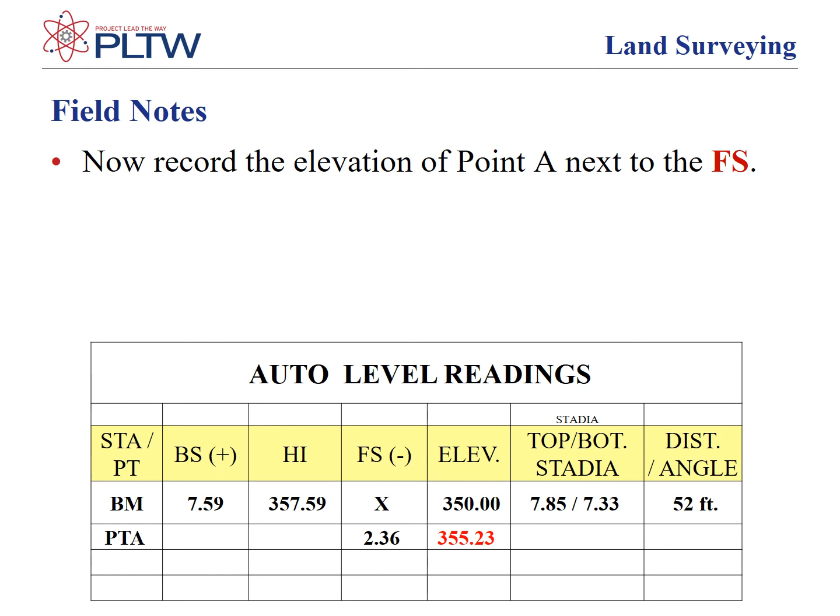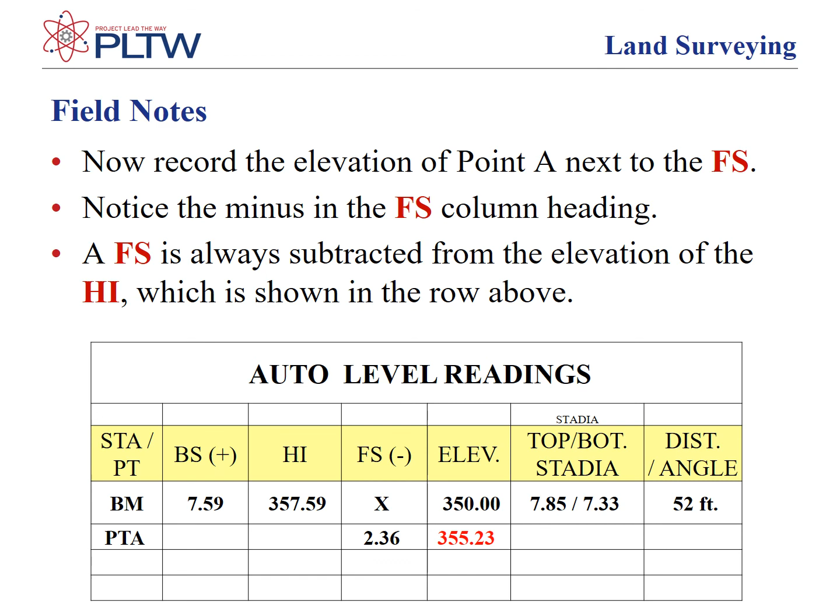Record the foresight in the Point A row. Now record the elevation of Point A next to the foresight. Notice the minus in the foresight column heading. A foresight is always subtracted from the elevation of the height of instrument, which is shown in the row above. Record the upper and lower stadia readings.

Estimate the distance from the instrument to Point A. First, we need to calculate the rod intercept. To calculate the rod intercept, we subtract the lower stadia from the upper stadia. Therefore, we would subtract 2.19 feet from 2.54 feet and get a rod intercept of 0.35 feet. Now we can calculate the distance. To calculate the distance, we multiply the rod intercept by the stadia multiplier. Therefore, we would multiply 0.35 feet times 100 and get a distance of 35 feet.

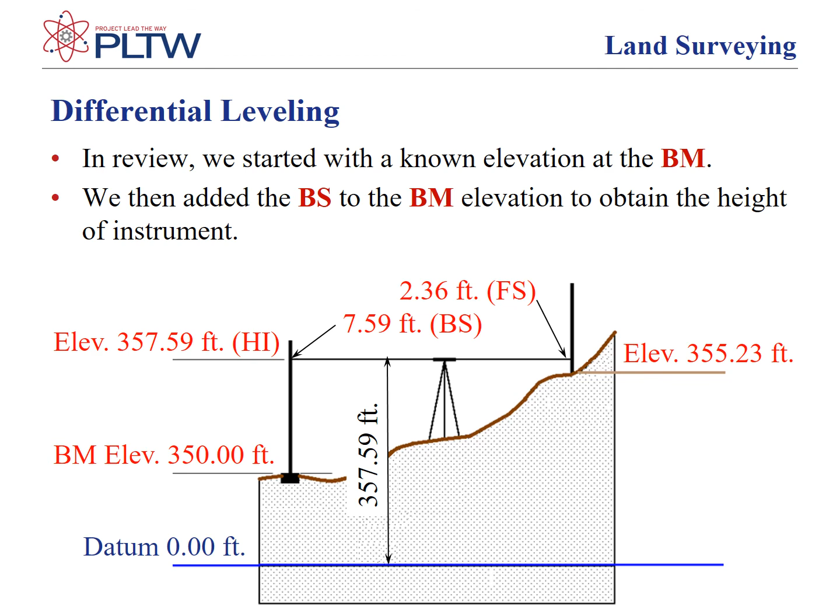In review, we started with a known elevation at the benchmark. We then added the backsight to the benchmark elevation to obtain the height of instrument. We then subtracted the foresight to the point of interest from the height of instrument to obtain the elevation of the new point.

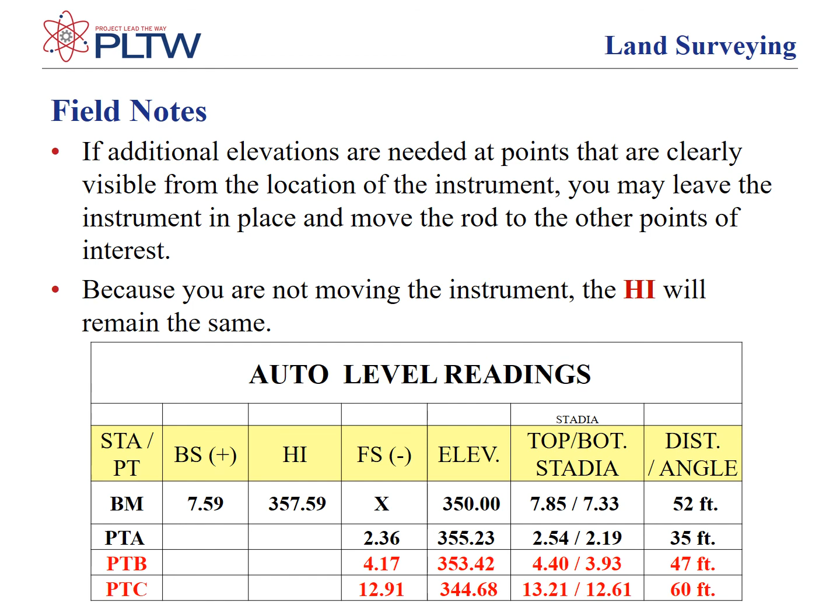If additional elevations are needed at points that are clearly visible from the location of the instrument, you may leave the instrument in place and move the rod to the other points of interest. Because you are not moving the instrument, the height of instrument will remain the same. These field notes show the progression of taking additional foresights to points of unknown elevations and calculating the elevations of these points. If the approximate distances are needed, don't forget to take the stadia readings while taking the foresight or backsight readings.